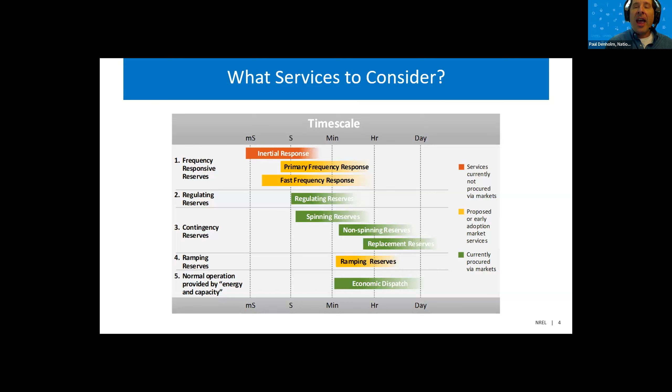So that's the early stage of storage. So when I talk about these 1 hour or less than an hour batteries, a lot of this storage went into those markets for contingency reserves, frequency regulation or regulating reserves. And so we spent a lot of time talking about that. But maybe we don't need to talk about it as much anymore.

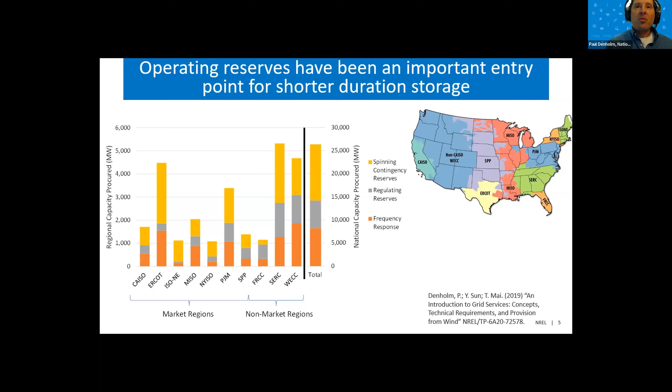This is the capacity required for 3 general classes of these operating reserves. And regulating reserves is the one that storage kind of went after most. And so it's significant. It's several thousand megawatts of capacity. But how does that compare to the amount of capacity we need for peaking or firm capacity? It's a pretty small fraction.

These markets are rapidly saturating or have largely saturated. There's not a whole lot of room for growth for provision of ancillary services. There are some in some places, but in California, the entire regulating reserve market is 300 to 400 megawatts. So there's not a whole lot of room for growth in terms of providing ancillary services from storage. The focus has really shifted to the provision of peaking capacity.

And that makes sense not only because of saturation of the ancillary service markets, but because peaking capacity is now cost effective. We've achieved the break-even point for lithium-ion batteries being cost competitive on a life cycle basis with a peaker, something like a flexible aeroderivative gas turbine.

So if you do a full life cycle cost calculation, 4-hour storage can now compete against a new peaker. So if you've got load growth or if you've got an old peaker that's retiring, storage is now cost competitive. And we're seeing a lot of the storage going in for this capacity resource, particularly that 4-hour storage device. So how can storage provide firm peaking capacity?

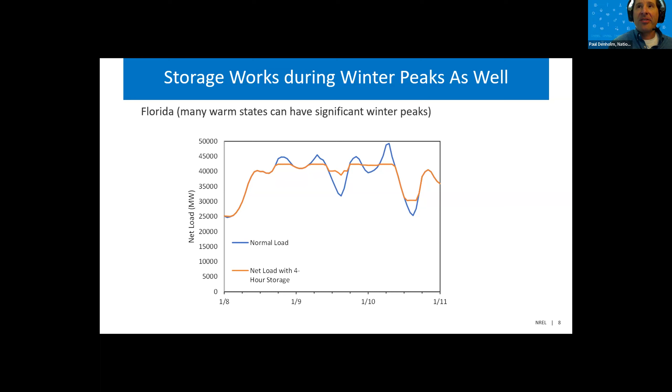Storage often does work in winter as well. You can clip the weird diurnal peak shape, but we're going to come back to this because winter peak is where we're going to see some differences in what particularly 4-hour storage can do.

Okay, so how do we understand the value of storage in providing firm capacity? Because we know that unlike a gas turbine, assuming it can get fuel, it can't run forever. So that's where we have to do some math to understand what is the duration required. So you can do something like an effective load carrying capability calculation to see how can I rate a storage plant? If I've got a 4-hour or 6-hour storage plant of 100 megawatts, can it actually replace a 100 megawatt gas turbine, or do I need to derate it?

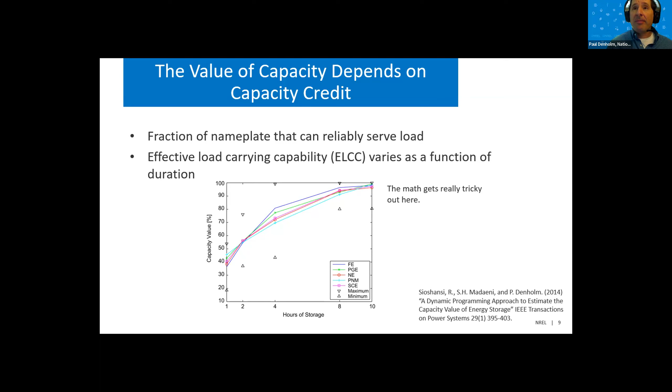And ELCC calculations can be pretty tricky. And so what a lot of markets have done is come up with this simple threshold duration rule. And that basically says, thou shalt have at least X hours to be eligible to get full capacity credit. Now you can be derated, and you can have this linear derate.

So if you had a 4-hour rule, like a lot of locations like California have, you could derate that plant. So if you got a 2-hour device, you could just derate it by half. So if you got a 100 megawatt 2-hour plant, you could rate it at 50 megawatts because you can then discharge it at 50 megawatts for 4 hours.

Okay, so this is what's been done today, and this is part of the explanation about why we saw that big cluster of 4 hours, particularly in California. You need 4 hours to get full capacity credit. So let's just build a 4-hour storage device. And now we can enter into a resource adequacy contract.

So load serving entities in California are required to demonstrate sufficient capacity to meet resource adequacy. So that can be done through bilateral contracts. So a load serving entity can sign a bilateral contract with a storage developer.

And as long as it's 4 hours, that load serving entity can then go to the California Public Utility Commission and say, okay, look, I've met my resource adequacy requirement through a mix of resources, including some 4-hour storage. So that's what many markets do instead of doing an ELCC calculation, particularly because ELCC calculations can be quite difficult.

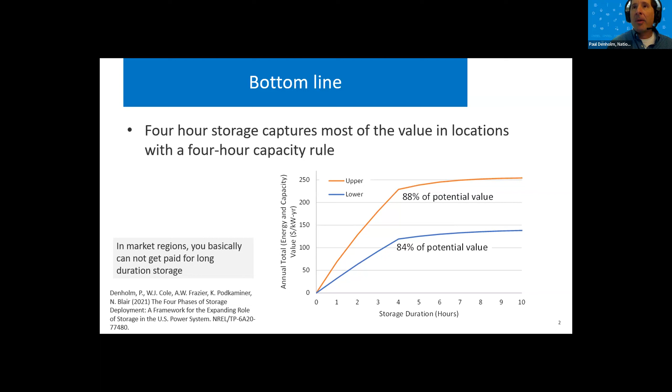This is why you see people building 1 hour storage for ancillary services, some 1 hour storage in places like ERCOT to take advantage of those extremely high price differentials that you see for just 1 or 2 hours per day, and then in places like California building 4 hour storage to get that combination of capacity payments and energy revenue. And 4 hours should be enough for now. When we do the math on these summer peaking systems, we see that 4 hours is enough.

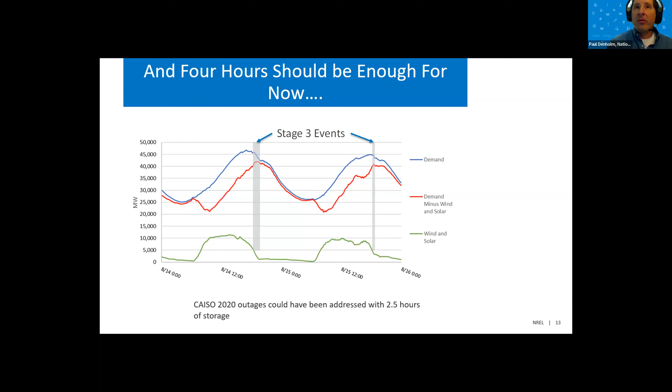This is an example of looking at it in a different way: when we've had incidents, especially in summer peaking systems, was 4 hours enough? In California, this is the 2020 outages, and the longest outage duration during those 2 days was about 2.5 hours. So if they'd had 2.5 hours of storage with sufficient megawatts of capacity, they could have avoided those outages. They require 4, but they certainly wouldn't have needed more than 4 to avoid those outages.

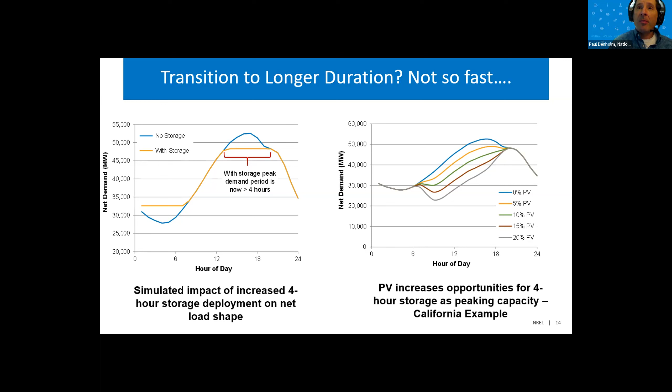And that is true, except again, in summer peaking systems, adding solar will chop off the left half of the peak curve and leave the right half of the peak curve for storage. The combination of solar meeting the first half and storage meeting the second half means that I can go a really long way with 4 hours. 4 hour storage will be able to provide lots of capacity for a long time in the summer, as long as we keep adding more and more solar.

Now you do eventually saturate, you do eventually get to the point where your peaks are longer than 4 hours. But quite frankly, the biggest transition occurs when we essentially shift to a net winter peaking system. And so this is the big deal. And quite frankly, this is the thing that scares me.

Like I thought I kind of had a handle on, oh, this is great. Solar and storage are going to work great together. They're a peaking resource. They're cost effective. We really nailed it. This technology is going to answer all of our needs for peaking capacity. But again, winter does happen, and we're increasingly seeing the shift to winter peaks.

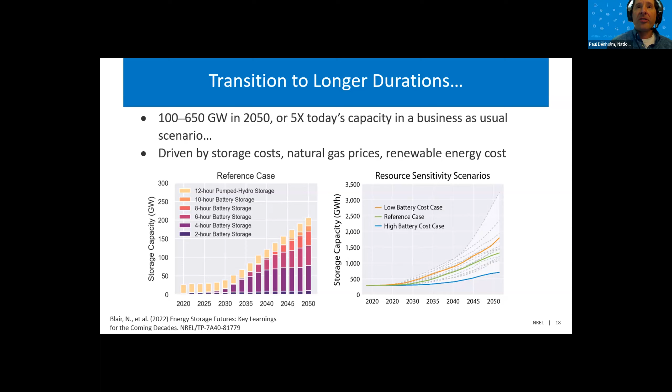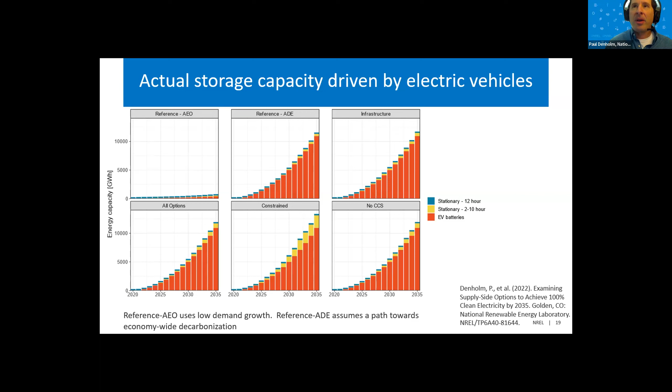That's not really core to my talk, but I think it's important to talk about because, hey, are we going to be able to build all these batteries? Well, if we can't do it for stationary storage, we certainly can't do it for electric vehicles, because that's really the driving point. So I want to make sure that we had plenty of time for the other speakers and just give you this overview, because I really think the key points here are fairly simple, and that is storage is cost competitive as a source of firm capacity.

So if a utility comes in with an IRP saying storage is the way to go, that raises questions: well, what about traditional resources? That's why. It's because it's cost competitive. And quite frankly, I'm fairly skeptical of IRPs that would come in and say no storage, because again, we're seeing the numbers pencil out.

Now, we do have a recent increase in commodity prices, and we'll have to see how that has affected recent prices. So there may be a temporary blip there. But I do believe that, straight up against the peaker, storage can increasingly compete if you do the analysis correctly. And then again, I think 4 hours is plenty for now and will be plenty for the near future, but it's really this transition to winter peaks that will drive durations beyond 4 hours.

Now, I didn't talk about technologies, and happy to do that, but one thing to keep in mind, of course, is that lithium-ion battery prices are declining. And so increasingly the competition against a 4-hour lithium-ion battery may be a 6-hour or even an 8-hour lithium-ion battery. But there are a number of technologies that are really important to consider, and some of them are emerging in various stages of technological maturity.

But it's great that we have a transition to a talk on thermal storage, because I think thermal storage is often overlooked. We've got a lot of kind of exotic battery chemistries that I think have promise. Again, I'm still a big fan of pumped hydro, but we really can't ignore all of the different technologies, including thermal storage, which will be the next talk.

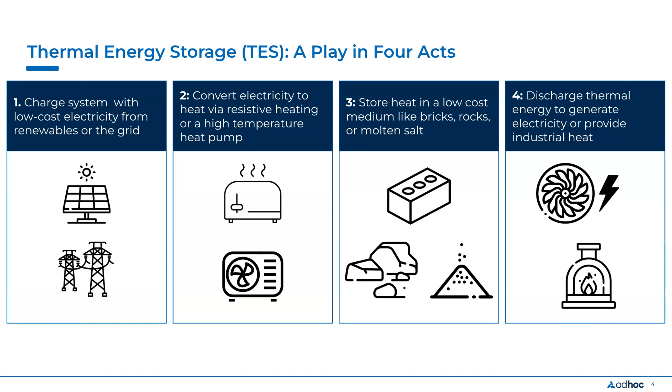When we look at thermal energy storage that's going to be converted back into electricity, generally the application for this, as Paul just alluded to, is for long duration energy storage. And the reason why thermal energy storage is seen as an attractive long duration energy storage application is precisely because that energy storage media, the rocks, the bricks, is so inexpensive.

This means that as you go longer in duration, all you have to do is add more of those rocks or bricks. So while you might have a relatively expensive turbine generating the electricity, that turbine gets amortized over longer and longer durations as you add more and more rocks, making the slope of this long duration energy storage cost line significantly less than lithium ion.

Now, for that to be valuable at all, generally you need to get out to a duration, as Paul sort of alluded to, where you're adding some value other than just the energy arbitrage, where it has diminishing returns with duration. And instead you need to be on a system that values that long capacity, and it could be in that winter peaking type scenario.

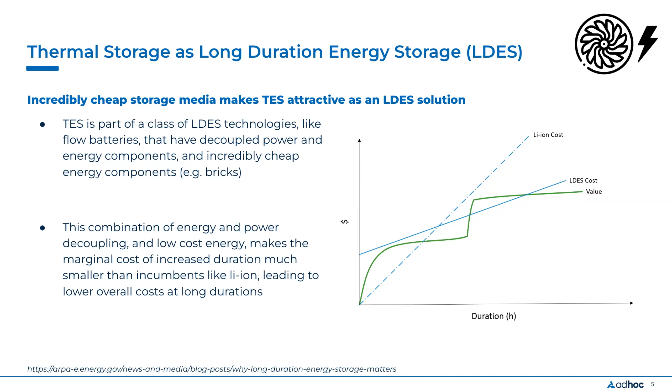Transitioning away from the long duration storage application, the bulk of what I'm going to be presenting on here is really thermal energy storage for industrial heat decarbonization. And so this is really what happens when you take that heat and instead of using it to return electricity to the grid, you use it to drive industrial processes. And this is a really large opportunity.

So over 20% of global CO2 emissions are derived from industrial heat. So this is the heating of industrial processes like metal treating, like coking, and a lot of boiling activities. A lot of manufacturing processes use steam in one way or another. That steam is generally generated through a fossil fuel boiler.

So what's interesting is thermal energy storage is able to store this heat relatively inexpensively at very high temperatures, so temperatures in excess of 1500 degrees C. And these temperatures are able to address 95% of these industrial heat applications. And once you're using that amount of energy in these thermal energy systems, it provides some really interesting opportunities for how it might integrate into the grid, which I will get into.

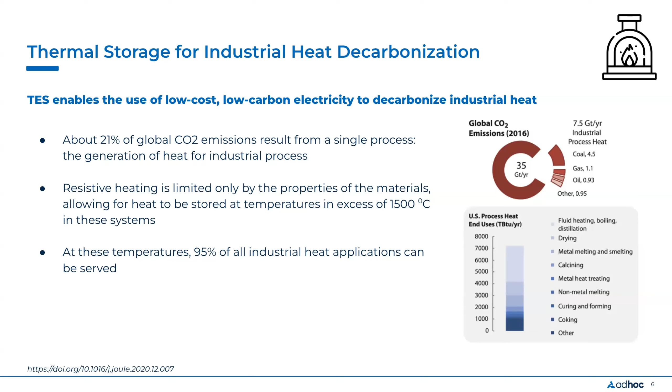So to understand the opportunity here, it's important to understand why this is an opportunity now and what the underlying economics of this opportunity actually are. So why now? Why is this an interesting opportunity to electrify industrial heat through thermal energy storage? And the answer is really the falling cost of renewables. So just as lithium ion batteries have plummeted in cost, so too have solar panels and wind turbines.

And when you look at some markets now, here I'm showing California, when you look at the cost to produce steam using power from a solar PPA versus the cost to produce steam from an 80 to 85% efficient natural gas boiler, you can see that we've actually reached a crossover point where steam from the solar PPA is less than steam from directly fossil-fired natural gas.

This is really a relatively new and monumental phenomenon that you would be able to generate electricity at a per unit energy cost less than from a fossil source on a heat basis, because generally our electricity has in the past come from turning fossil fuels into heat and turning that heat into electricity. And all of those steps have significant efficiency losses.

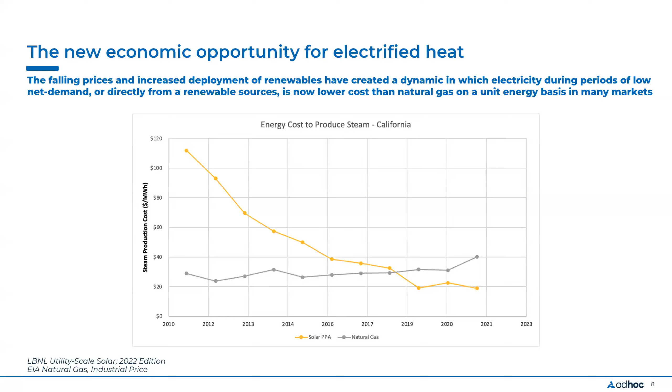Just looking one step further at the unit economics here, if we look at the US average natural gas price on just looking at what it costs to produce steam on a per energy unit basis, that's around $29 per megawatt hour. Now, if you just take the average US electricity cost and try to turn that into steam, it's over 2 times as much as that. So it does not make sense just to take grid electricity at the average rate and turn it into steam.

But once you start looking at the value or the price of a solar PPA or the marginal cost of some of these resources, what they're actually bidding into the market, at certain times they can be significantly less than that average cost of natural gas. And we see that those costs are also much less than other kind of clean forms of heat, whether that be through renewable natural gas or through green hydrogen, looking both at the unsubsidized cost as well as the subsidized cost of hydrogen if you assume the full IRA incentives.

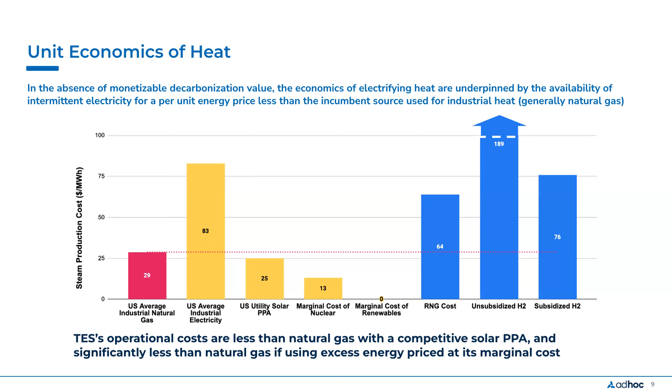And so how does this actually interface with the grid, and how does the actual thermal storage element play? So one thing to think about when you think about the flexibility that thermal energy storage can provide on the grid, it's different than other forms of load flexibility we've seen in the past. Traditionally, programs that look to load flexibility on the grid are talking about some sort of demand response program. And in a demand response program, we're taking an existing load and we're incentivizing it to curtail itself at times of high net demand.

So this is saying the grid is strained. We need additional capacity on the grid. We are going to pay you, electricity users, to turn down during this period so that we have enough capacity on the grid. Thermal energy storage, on the other hand, is what we would call a dispatchable load. So this looks different in that it is actually being dispatched at times when net demand is low. And in its base case, it adds no new demand to times when it's high.

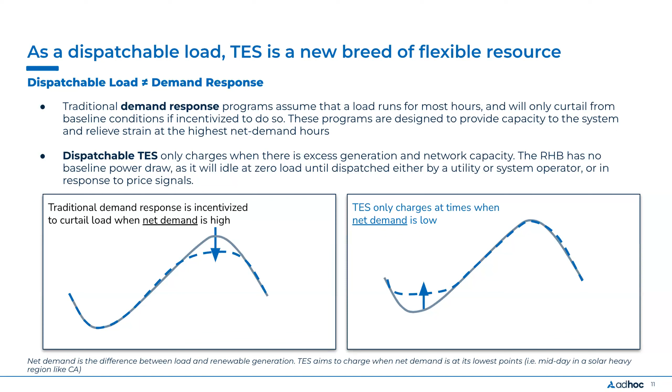So it will have preferably an economic incentive to be deployed at these times when there's excess generation on the grid. These might be times when there is solar or wind curtailment happening. And at these times of low price and high renewable availability, this is when this thermal energy storage wants to gobble up as much of that electricity as possible. And it wants to then be turning itself off well prior to reaching any sort of peak net demands on the system. So this offers a different paradigm and offers a number of highly valuable attributes into the system.

So one, this allows for us to electrify more load and bring more load onto the system while utilizing existing system assets. So this allows for load growth without substantial overbuilds of the T&D system, because these assets will want to be drawing power at times when utilization of that grid infrastructure is low. So it allows us to amortize those system costs over a larger load base.

These systems also naturally have quick response times. As Paul mentioned, these markets for these sorts of ancillary services are fairly shallow, but there are still occasions where having a load that can provide these ancillary services can still be valuable in some locations on the grid. These are also very large. We're talking gigawatt scale flexible assets. So when we're talking about needing to put gigawatts more of renewable assets on the grid, pairing that with loads that are of similar order of magnitude with flexibility allows us to more easily integrate those new renewables onto the grid.

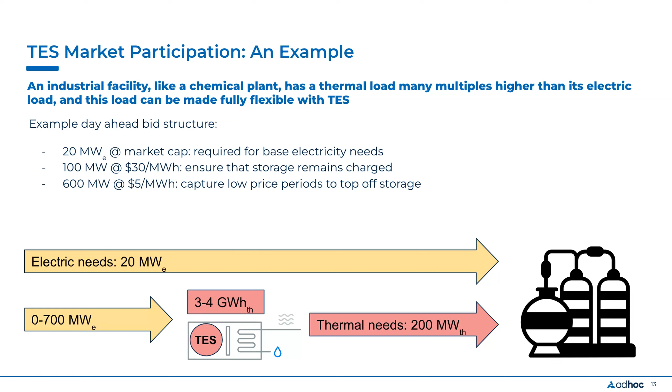So you can see the level of flexibility here is really quite dramatic. It's going from a base load of something like 20 megawatts to an intermediate draw that it wants at, say, 120 megawatts, all the way up to being able to ramp to 700 megawatts, if that's what the market dictates is most effective.

So what are the barriers and opportunities for thermal energy storage and heat electrification to actually participate in markets? There's a few challenges that are keeping these systems off the grid right now. One is interconnection bottlenecks, both for these thermal storage assets themselves, as well as for renewables.

Right now, there are actually bilateral deals happening in the market between renewable developers who aren't able to get through the interconnection process to bring their energy to market, and thermal energy storage providers and industrial heat users to, instead of connecting that project to the grid, connect it directly to the industrial facility. Now, I think from a system perspective, this is suboptimal because we would like to see all these resources integrated into the larger market. It's the market that can help us drive efficiencies and decarbonization economy-wide.

Similarly, there are also accounting protocols in some carbon markets that are incentivizing those bilateral agreements, such as low carbon fuel standards, which force an industrial facility to use a grid average emissions factor if they're generating their heat using grid power, even if they're intentionally doing it at times when we know the marginal emissions on the grid are low. This incentive is driving towards direct connections instead of grid connections.

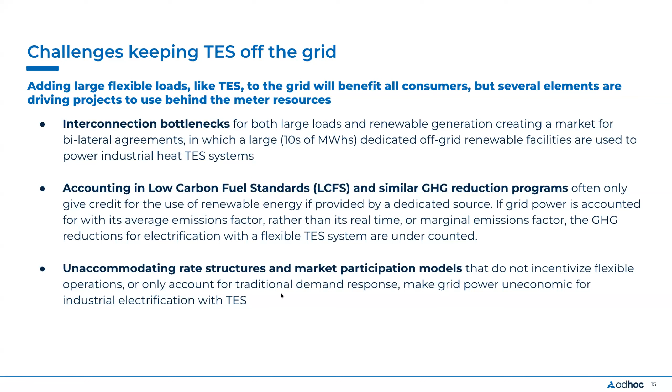So the market rules are really going to dictate what stakeholders can benefit from thermal energy storage and where these solutions actually get deployed. As I mentioned, one of the key factors here is access to the underlying dynamic price signals. So this would be something like the LMPs within an organized wholesale market.

It also requires that we look at reducing the number of fees that get put into volumetric fees as opposed to fixed fees, because these systems are very sensitive to the marginal unit cost of energy they're procuring. And so if a fixed fee is instead bundled into a volumetric fee, that will have a significant impact on the dispatch and viability of these systems. And finally, when we look at T&D charges and other demand charges, charges that are assessed on a coincident peak basis, i.e.

When the whole system is at its peak demand, these are charges that these systems can proactively avoid, because they ideally do not want to be dispatching at periods when the system is at its peak. However, if demand charges are assessed on a non-coincident peak, that is the specific peak power that is drawn from these systems, whether it's at a time of grid strain or not, that can really be a killer for these

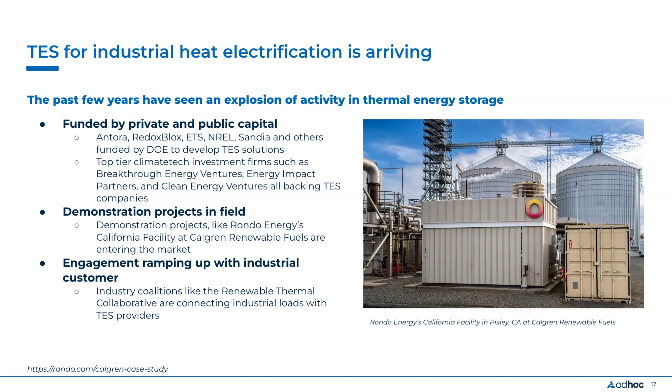So what I will leave this audience with is that this technology is arriving, and in some cases already here. So there's a lot of public and private interest in these solutions. As I mentioned, I'm working directly with Rondo Energy. This slide is showing a picture of their demonstration facility in California at an ethanol refiner. And we're seeing a lot of ramping up going on with industrial customers who really want access to this sort of solution. So I really look forward to talking with this group more in the breakouts.

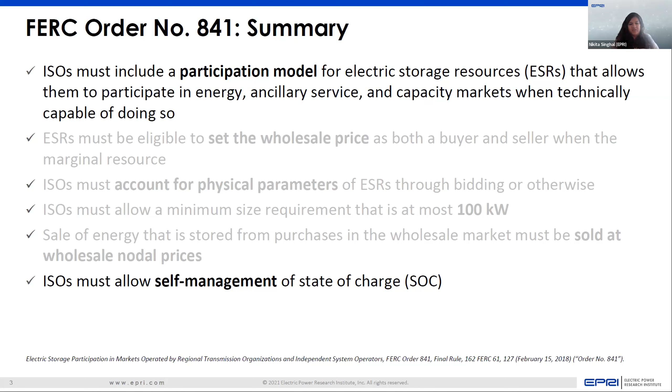I won't go into all the other requirements of the order, but the one key requirement that was significant was the fact that ISOs were required to allow for asset owners to self-manage the state of charge of the assets. And essentially, the ISOs should not solely be controlling the resource, so they shouldn't be operating the resource themselves, but rather also provide the developers with the flexibility to manage the state of charge of their own resource.

Now, what does a participation model mean? The notice of proposed rulemaking basically defined a participation model as a set of tariff provisions that accommodate the participation of resources with particular physical and operating characteristics within these wholesale electricity markets. It takes a lot to represent these physical and operating characteristics of specific resources within market clearing software. So we also mentioned that a participation model includes a set of market clearing software provisions that are required to represent these characteristics.

So essentially, participation model characteristics can include anything that would require change in the market clearing software to integrate a new technology. It can also include what kind of bidding parameters may be needed by a resource to interface with the market, what services they are eligible to provide, and how we can model those service provisions within the market clearing software.

Now, anytime a new technology begins to participate in wholesale electricity markets, there may be a need to introduce a new participation model, but it comes at a significant cost because this requires a lot of stakeholder meetings and also changes to the market clearing software that requires cost, right?

There is the option to modify existing participation models, but that may be inefficient because you may be trying to fit a particular resource into a participation model that may be meant for a different resource type. So you may not accurately capture the efficient features of this particular technology. However, it does have the benefit of being easy to implement and it's already understood. There is always a trade-off in understanding whether or not there is a need for a new participation model. Are we seeing significant penetration of a resource that it deems it important to introduce a new model?

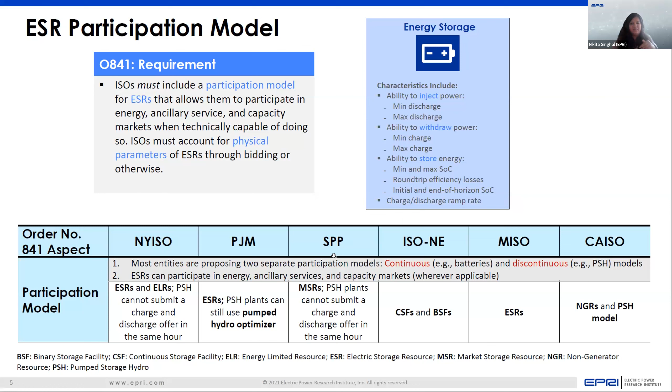Whereas a pumped storage hydro resource has certain constraints in that it can only operate at a certain minimum charging level. The pumps can charge at a specific point, and the turbines can discharge at a specific point. They have minimum constraints, so these introduce non-convexities into the market. So essentially most of the ISOs introduced two separate participation models, one for batteries, which is a continuous participation model, and the other for pumped storage hydro resources. I won't get into the details of what they call these participation models, but feel free to refer to this slide once you get a chance to.

Now, switching gears to the state of charge management of this specific technology, given that energy storage resources are energy limited, a lot of thought has to go behind how the state of charge of these resources can be managed. There are 4 different ways in which the state of charge could be managed. One is self-scheduling the batteries, or the asset owners could manage their own state of charge, referred to as self state of charge management. And then the last two on the right side are state of charge management light and ISO state of charge management, where the ISOs themselves manage the state of charge of these resources rather than the asset owners.

The difference between these two options is essentially in the way the market clearing software is designed. In state of charge management light, some ISOs use a sequential design for clearing security constrained economic dispatch programs, as a result of which they optimize these assets on an interval by interval basis in a sequential manner. Whereas a subset of the ISOs solve the problem using multi-interval optimization, which is more efficient, because you get to look at multiple intervals in a single snapshot. That's referred to as ISO state of charge management.

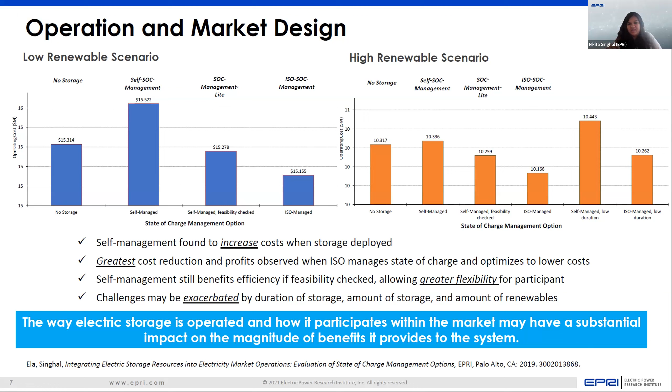So essentially, this is important because the way you operate an electric storage resource and how these resources participate in the market can have a significant impact in the magnitude of benefits that we can obtain from these technologies. And the same results were also seen in the high renewable case, but I won't get into the details of that.

Now, there is one specific aspect with these technologies. So I think Paul gave a nice introduction about how 4-hour batteries are what we are beginning to see, right? And it's enough to clip the peak demand. But there is a big issue when it comes to market clearing software design. And this is because of the fact that we solve multiple markets on multiple timescales.

For, let's say, tomorrow, you solve a day ahead market today. And in real time, you then solve another market because you have better forecast accuracy in real time, right? So you update the forecast and then you resolve the market in near real time. And day ahead is just a means of making sure that your long start units, which have longer minimum up or down time constraints, or a startup notification, can be started up in advance of the real time market.

So the fact that we're using these multiple time scales to solve the market can complicate the state of charge management of these new technologies, particularly because the day ahead market solves the entire day in a single shot, right? It solves 24 hourly intervals, whereas in the real time market, the maximum that the majority of the ISOs look at is 3 hours ahead.

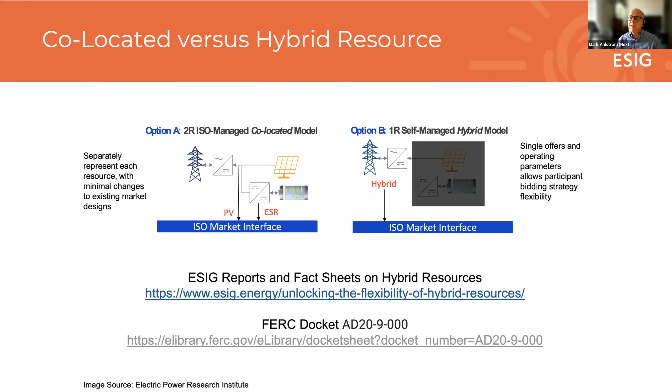But as we'll see, that might change in the future because, as was also pointed out in additional EPRI work that we could show you, there is increasing concern about the computational complexity and just the overall complexity of the ISO RTO, whether that's what they ought to be focusing on in the future. So that's the difference. Co-located and hybrid can be exactly the same hardware system. It's just really how you look at it from a participation model point of view.

So this philosophy is really that if you're doing a hybrid as a single resource, it's looking more like an intelligent agent for a system of technologies that offers energy and services at the point of interconnection, the POI, really just like a more ideal conventional resource, but with more flexibility and fewer constraints because of its use of energy storage, power electronics, and software. It becomes a more ideal resource in the sense that you probably don't have to worry about startup times or ramp rates. It's got so much flexibility, and you can control this software any way you want to provide these services.

Said another way, I've generalized this often before. I say, you give me enough energy storage, electronics, and software, we can emulate any kind of electrical machine you want to see at that point of interconnection, right? What exactly do you want it to do?

Julia's going to talk about this in another sense, more the hardware interconnection, about how we can use this flexibility. Very important topic, but that's dealing with a really fast interface with the grid and what happens during disturbances and so forth. I'm talking here about doing this at the larger market participation model level, about how we philosophically look at resources in the future.

Now, the other thing that's really driving this, and I think Paul alluded to some of this too, is that when we start combining storage and PV, we see very quickly that in almost all of these new types of inverter-based power plants, we're actually overbuilding the capability inside the plants already. Anybody building a 100 megawatt utility scale PV plant, just PV alone, might be 100 megawatts at the point of grid interconnection, the injection limit, the max you can inject into the grid, but you're likely to have maybe 140 megawatts of PV panels behind that inverter inside the plant.

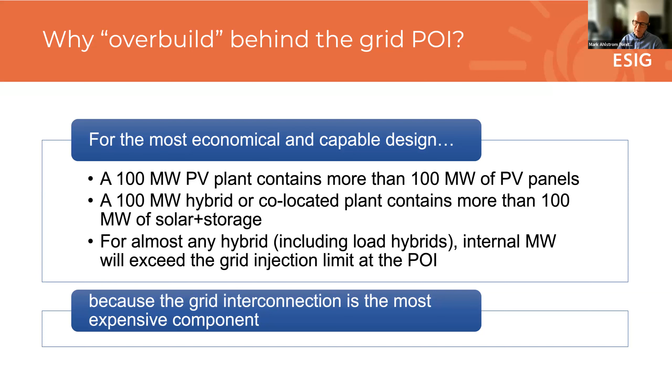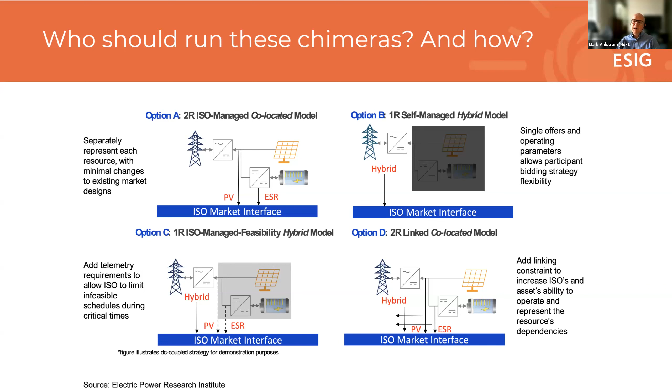But the question is, who should take on that problem, right? Should it be the system operator that adds even more complexity to do this? Or should it be the hybrid operator that uses its analytics and does it more as an offer of services, with penalties for failure to perform, optimizing with its own analytics?

So here's what really drives my thought on this and why I've spent a lot of time on this in the last 4 years: I'm getting old. I've seen a lot of stuff. I was in the software industry for over 20 years before I got into energy by accident, actually. So yes, if we want an optimal solution, as we found with software, we could do it by just writing a continuous monolithic top-down program that squeezes everything possible out of the hardware, right? But it didn't take software long to figure out that these machines we're creating with software were rapidly, exponentially getting more and more complicated.

So we had to deal with this complexity, right? So how do we deal with this complexity? System architecture became important. And the way that software did this was to say, look, I'm not going to just write a continuous stream of low-level code to optimize this stuff. It's just not worth it anymore.

I'm going to organize into subroutines, and that moved into object-oriented programming where you would have separate objects that did different functions. And that's gone all the way now to service level interfaces and intelligent cooperating agents where you say, look, this is your energy factory over here. I don't care how you do it inside your walls. I just care about how it interfaces with me and provides the grid services and energy dispatch that I need, right? Make it somebody else's problem.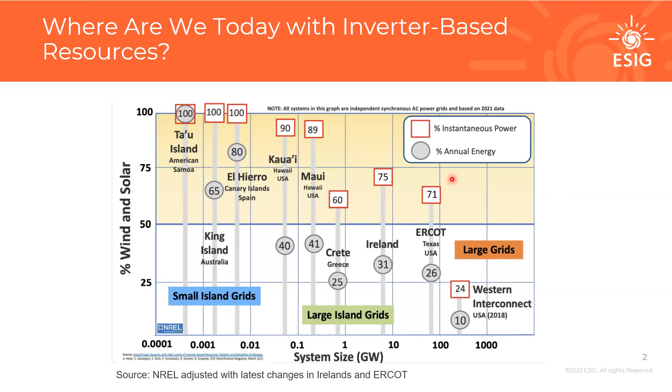Last year in April, ERCOT actually reached 71%. So basically, during shoulder time in spring, in the beginning of the day, when sun started rising already, so they got some solar penetration and wind was really high, they got to 71%. So we're getting into these high numbers, and we're starting to see some new operational challenges.

So both of those challenges actually stem from the fact that most of the inverters today, wind, solar, and storage inverters, they are so-called grid following. So what they do, they read a signal, voltage and frequency from the grid, and they lock onto that and they inject power into the grid, which is aligned with the signal that they read. So basically they use grid as a reference. And the signal comes from traditional synchronous generators. So think coal-fired, gas-fired, hydro generation that we have today.

And so the further the wind and solar generation pockets are from synchronous generation areas, the weaker the grid. And then if the grid is weak, then the signal that inverter-based resources are using as a reference is easily perturbed as these resources are injecting power into the grid.

And so it may be hard for inverters to lock on the system correctly, and this may lead to instability challenges. This is illustrated on the right-hand side with an example of ERCOT. ERCOT in the west side of the grid has a very good resource for wind and solar generation, and currently gigawatts of wind and solar generation are already installed in this area.

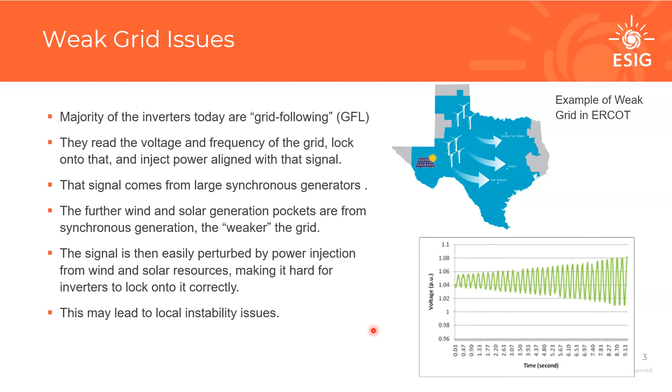Another issue, which you might have heard of, is a problem with synchronous inertia. Following a resource trip, so a generator trip, the initial rate of change of frequency is solely a function of synchronous inertia on the system. Today, this inertia is provided by synchronous machines. With increasing shares of inverter-based resources, there can be periods when synchronous inertia is low, because less synchronous generation is available: some generators retired or are not committed at the time, so they're not online and providing inertia.

And why is it important? Because it determines the time that any frequency control or frequency response mechanisms have to respond to this frequency decline. If this time is insufficient, the frequency decline is too fast and it can trip under-frequency load shedding. So basically involuntary load shedding may happen if frequency decline is too quick. That's where the problem is.

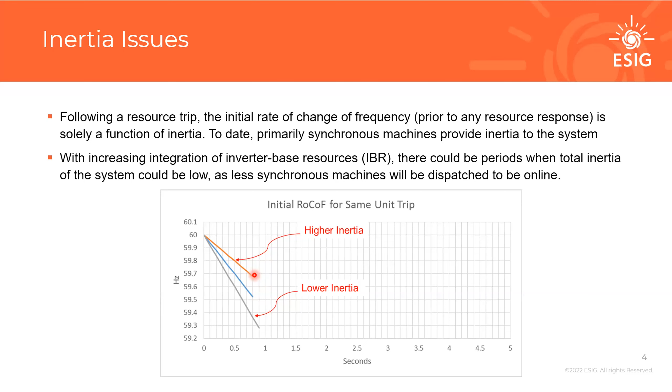As I mentioned, traditional inverter-based resources, wind, solar, and storage that we have installed on the systems today, are grid following, and they are not contributing to system inertia or providing system strength. They also displace synchronous generation in the dispatch or in unit commitment, and that may exacerbate weak grid and inertia issues because there is less synchronous generation online that traditionally has provided some of these services.

Additionally, grid-following inverter-based resources require sufficient system strength to operate stably, and they also require sufficient inertia if they are providing any kind of frequency response, basically to be able to measure frequency change and provide frequency response service. So possible operating issues with a high share of this type of inverter-based resources are deeper frequency deviations after generator trip events because inertia is getting lower.

There can be control interactions between inverters in areas with low system strength. There can be issues with resources riding through system faults because of reduced system strength. There can be protection issues because it becomes hard to detect that a fault is happening on the grid. And also diminishing black start capability, because synchronous generators traditionally provide black start service to the grid, and as they retire, there may be a smaller pool of black start resources that operators can rely on.

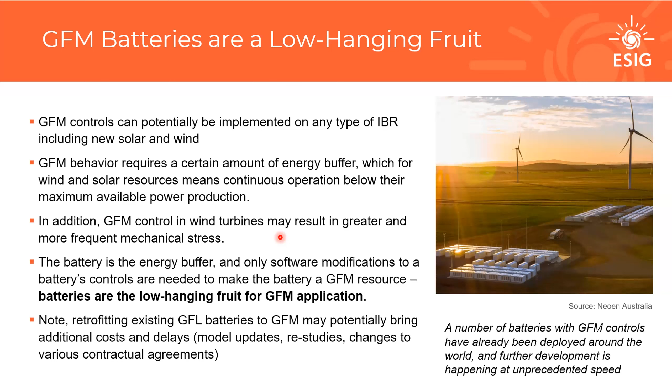And that's a fair question and a fair thing to consider, but retrofitting existing grid following batteries into grid forming controls, even though it's just software, still potentially brings additional costs and delays because it requires model updates, restudies, and changes to various contractual agreements. So this option needs to be carefully evaluated against the option of going for grid forming batteries upfront already now. So not only is the battery a low-hanging fruit for application of grid forming controls, we also currently find ourselves in a unique window of opportunity to deploy grid forming capability on batteries.

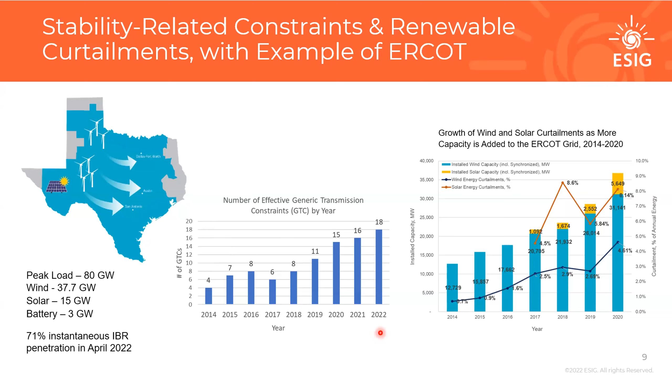Another solution that can be looked at is building more transmission. This transmission is not needed for additional transfer capability, but it is built in parallel with the already existing export path from the weak grid area. What it does effectively is reduce the electrical distance from a weak grid area to a stronger grid, basically making the weak grid area stronger.

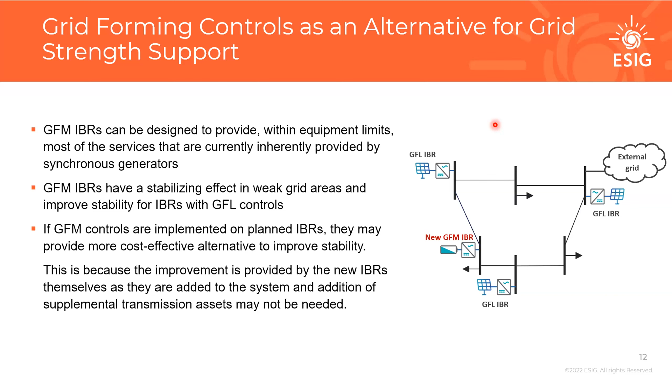But if, on the other hand, this new battery is built as grid forming, then it already provides enough stability even for existing inverter-based resources, and this synchronous condenser is not needed, and the cost is saved because this new resource is providing services to the grid by itself.

And so there are a number of existing projects around the world. Some of them were built as pilots, some of them are real projects built because there is a financial incentive or a requirement for grid forming. Some in Hawaii, and Hawaii is currently also looking to install more. There are several being built in Great Britain.

Germany has one for islanded operation of part of the grid, and additionally in Australia, at the end of last year, they announced co-funding by the Australian Renewable Energy Agency for an additional 8 large-scale grid-forming batteries across Australia in strategic placements to improve stability of the grid, and that amounts to 2 gigawatts of battery storage.

So just very briefly to mention specifications for grid forming. To deploy this capability, there needs to be some kind of requirement of how they are supposed to behave, or what kind of capabilities are needed by the system operator. Development of these requirements started in 2019, initially with a number of projects funded by the European Union. Then the Association of System Operators in Europe looked into providing 7 capabilities that are needed from grid forming inverters.

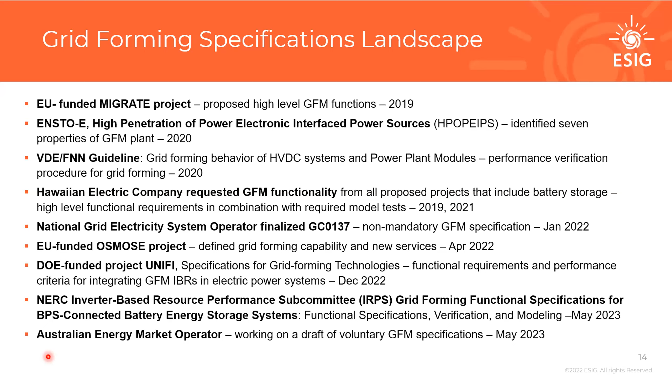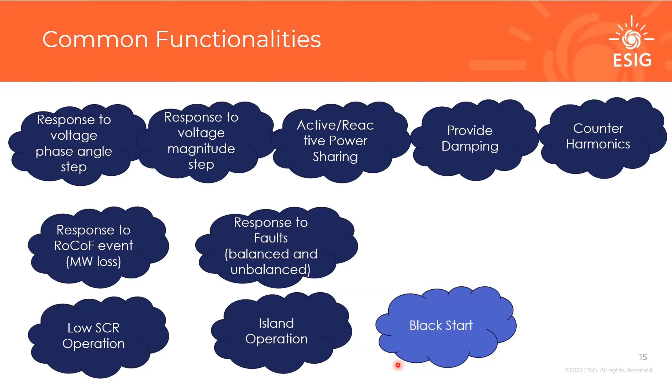And very recently, at the end of May, Australian Energy Market Operator released their non-mandatory requirements for grid forming inverters. So even though there is a list of requirements and you may think they may be different, and they call capabilities different things and use different terms, overall these capabilities that they're seeking are pretty similar, and that's very encouraging because it means that there is no big diversity between what operators are looking for. And so I have the list of these requirements. I won't be reading it through, and I have this Black Start capability as a separate thing because not all of the resources need to be Black Start capable, and that requires additional hardware to be added.

So just in conclusion, the specifications for grid forming inverters are developing together with controls. They use similar terms across the specifications that are available today. Some requirements are more specific than others, and in some cases, the requirements are accompanied by performance expectations during testing, testing applied to models and testing applied to hardware. And currently balance is needed between incentivizing desirable behavior, but also allowing some freedom in control implementation, because the controls are still an active area of research and are being developed. High-level requirements accompanied with test specifications are the recommended approach today. And then some functionalities can be implemented also in grid following inverter-based resources, and they should be left out in grid forming specifications.

So just to summarize all that I was pitching for today, we have an opportunity to future-proof our system by deploying grid forming control capability in batteries today, because it's a low-hanging fruit for solution in weak grid situations. And the opportunity for system operators and utilities to utilize this low-hanging fruit may soon pass because we have interconnection queues full of batteries that, in the absence of any incentives, will be built as grid following, and then we'll need to install additional equipment on the grid to support them. So while there is a relatively small number of utility scale batteries on the grid today, in the next few years we'll have many of them, and incentivizing new batteries to be grid forming may help even deploy more grid following wind and solar inverter-based resources.

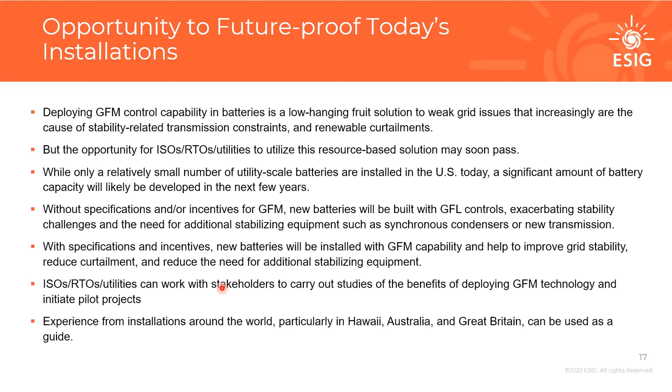That was a great introduction to how we can future-proof tomorrow's system by adding a cheap piece of technology today. And I'll just add, you talked about Kauai. They have some of the earliest experience with hybrid systems. I was in a WEC storage meeting with them, and someone asked, is there anything you would do differently in your storage experience? And they said they would have put grid forming controls on their batteries, on all their batteries.